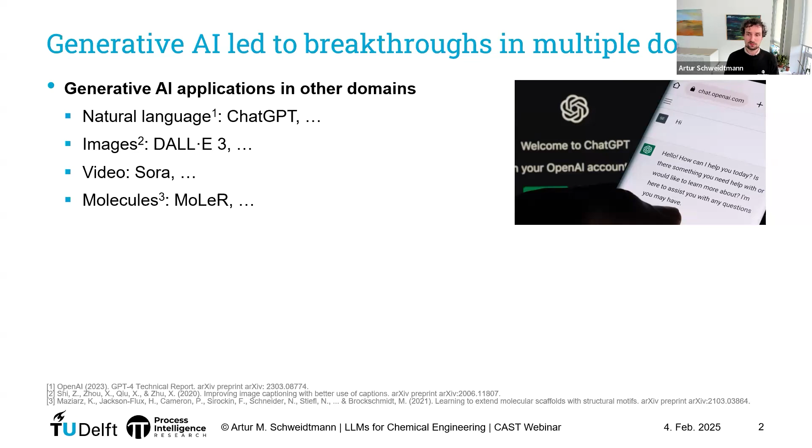And of course, these models don't work only on text or natural language. They also work on other modalities, we say. So we know there's images that can be generated by models like DALL·E 3. There's models that can generate videos, or more close to our domain, there exist generative models that can generate molecules, for example, molecular structures. And these have been or are currently developed in, for example, pharma companies, in research groups, and so on.

But I'd like to focus a bit more on the engineering aspect of chemical engineering, the process engineering aspect. And here we don't have much literature. We don't have a lot of tools available yet. So what I want to discuss with you is how would it feel like to have Gen AI or large language models in our domain, and what does it take to develop them, and would they be any useful? Is it feasible? Is there a business case for that? Is this the future, or is it just another random idea that turns out not to be making it to the practice?

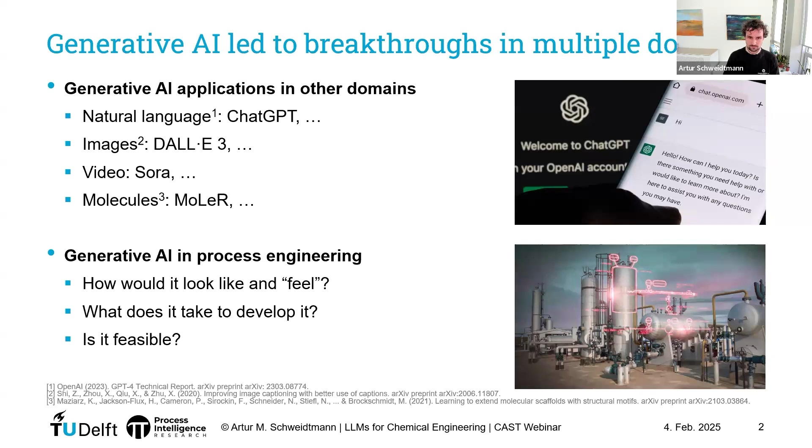And before I go into the engineering world, I'd like to talk about large language models and just give a few examples of different use cases where these kind of models are used. And the first one being GitHub Copilot. So in GitHub Copilot, we have large language models. Usually these are transformer architectures trained not on English language, but on computer language, on code. So this can be Python code, for example. So this is a model that is basically auto-completing your code while you develop it.

So for example, if you were to implement a function in a programming language like Python with a specific purpose, you could just write a small comment saying like, now I write a function that counts from 1 to 10. And there's a fair chance that GitHub Copilot would pick this up and directly give you an implementation or suggest an implementation for this function. And it's believed that these kind of models will really change the way we develop software. So it's believed that large language models like GitHub Copilot here will decrease software development cost by around 50% in the future and accelerate developments.

Of course, there's not only sunshine, there's also a lot of discussions about the use of Gen AI or large language models in these fields. For example, in the context of education. So if all the developers in the world are going to use these models, we may need less junior developers because the simple tasks are taken up by the model. But how are we going to educate our senior developers in the future if there are no junior developers anymore, for example? Or do we still need to teach that?

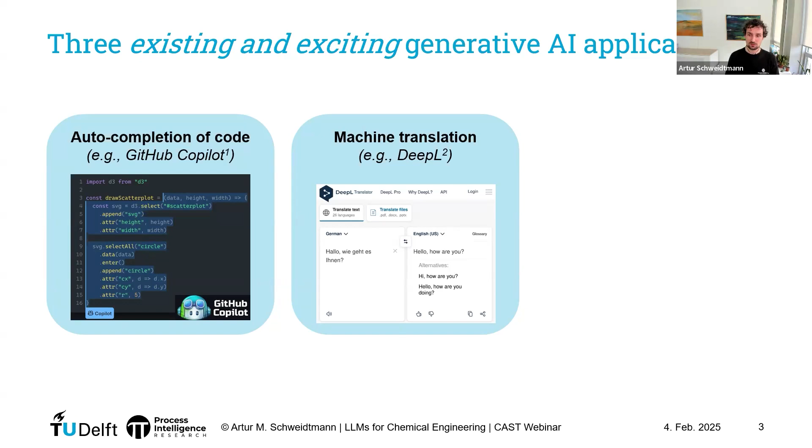So for example, if I were to give you a book and ask you, hey, can you translate this from Chinese to Japanese? You would likely struggle with this task. But with the help of large language models or translation engines that are often based on similar architectures, like neural networks with transformer architectures nowadays, you can do these tasks in a matter of minutes, maybe hours for a bigger book, right? And with very low cost compared to manual translation with a translator. And this is where we see this disruptive nature of large language models developed for specific applications. So they really changed the whole translator business, right?

Another example is Grammarly, which is a software for finding and correcting errors of language. Again, it's not only large language models, it's a combination of different models. It may not be as transformative as the other example, but still, if you're a book editor and I give you a book to edit, to correct, maybe with 2,000 or 3,000 pages, these kinds of tasks are significantly easier now, given tools like Grammarly. So it really reduces the number of errors you make in such writing. So what we see is in other domains, there can be a transformative action resulting from the use of large language models or similar Gen AI applications.

But I don't want to talk too much about other domains. I want to talk about the process engineering domain, chemical engineering. And here, what I want to emphasize is that most of the successful applications of large language models are based on language, on natural language. So here on the left-hand side, we have code. We have English text maybe. However, in our domain, we don't work that much with language only. We have a lot of the engineering knowledge encoded in different kinds of data formats.

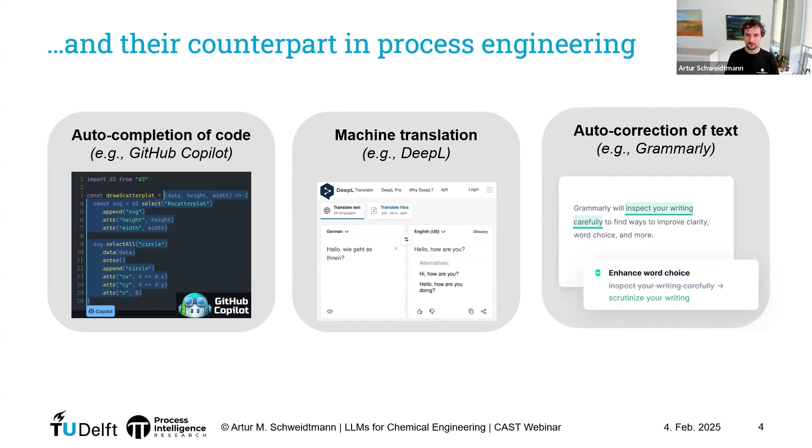The key point is really that I don't want to focus only on the modality text. So if you want to develop large language models or Gen AI in your domain, within chemical engineering or even outside, don't limit yourself to text. I think that's my main message, first of all. So what if we think about Gen AI more generally in chemical engineering? Well, if we apply this idea of autocompletion of code to processes, what we can think of is an autocompletion of chemical flow sheets. So would it be possible to develop Gen AI tools that help you to autocomplete or develop chemical processes? For example, by suggesting the next unit operation, the design specs of these unit operations, or the operating conditions, and so on.

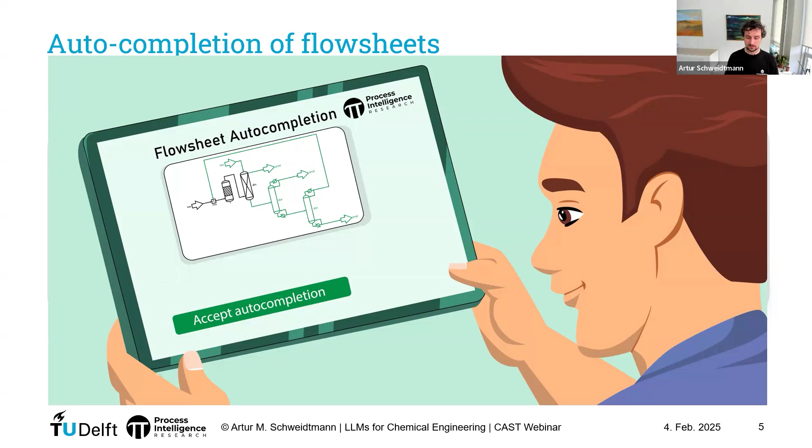And when we talk about translation, well, is it possible to develop algorithms that help us to develop a P&ID-like diagram from a PFD? So translate an early stage of development to a later stage. Or maybe translate is the wrong word here. Maybe it's rather learning what the engineer is doing.

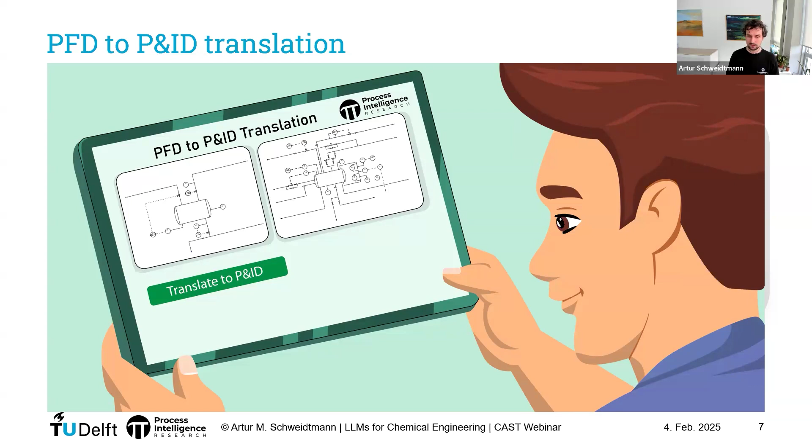And of course, there's not only the PFD diagram as an input, it's a lot more other documents. Most likely these are multimodalities, right? So we have the diagram information, but we also have text, like process descriptions, requirements, and so on. And the last one is quite obvious now. When we can find errors in text, would it be possible to also find errors in diagrams? Okay.

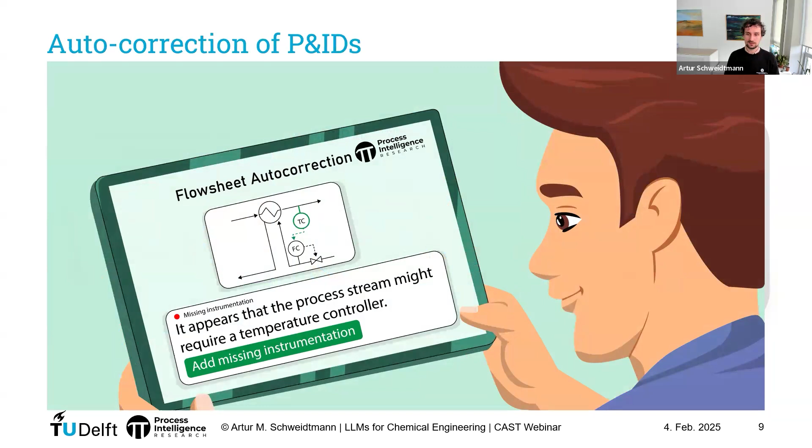So these are the first three applications that I wanted to show you. There's a fourth one that's quite relevant that we also look into in our research group, which is also related to making errors in P&IDs and finding them, especially in the context of safety. So would it be possible to automatically generate HAZOP reports from P&IDs and additional process data?

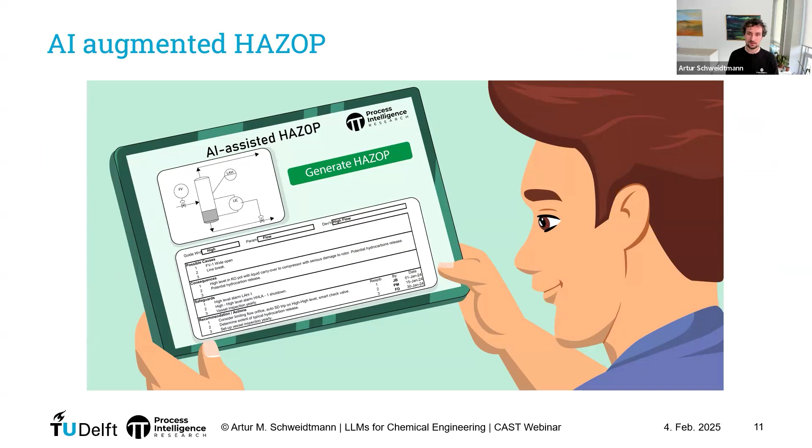And of course, all of these applications are not meant to replace a human, but rather work together with a human, assist the engineers essentially in their day-to-day work. So if we have this idea of Gen AI or large language models helping us to develop processes, translate from one stage to another, find errors, generate HAZOPs, helping us to do our job.

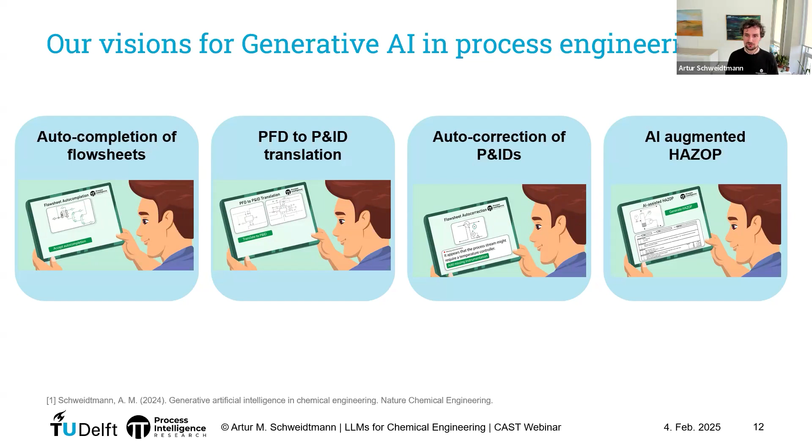I think one of the main questions is, well, can we just do it with the tools that are out there already? Can we just go to ChatGPT and ask, hey, can you help me to develop my process? Can you please draw a chemical flow sheet for producing this product? And I'm not sure if you have tried it. I tried it many times. The answer changes over time, of course, but I give you the general gist of the answer.

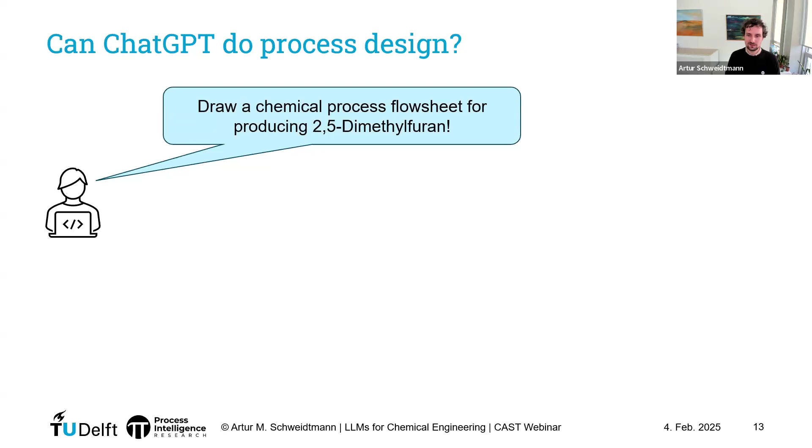So in many cases, the models are quite positive, first of all, which is good, right? So I want to hear, hey, I can solve your problem. And what you see is the model also figures out that, well, it needs to generate something beyond text. We're asking for a diagram, so it needs to generate an image in this case. And it takes a bit of time till ChatGPT has generated this image.

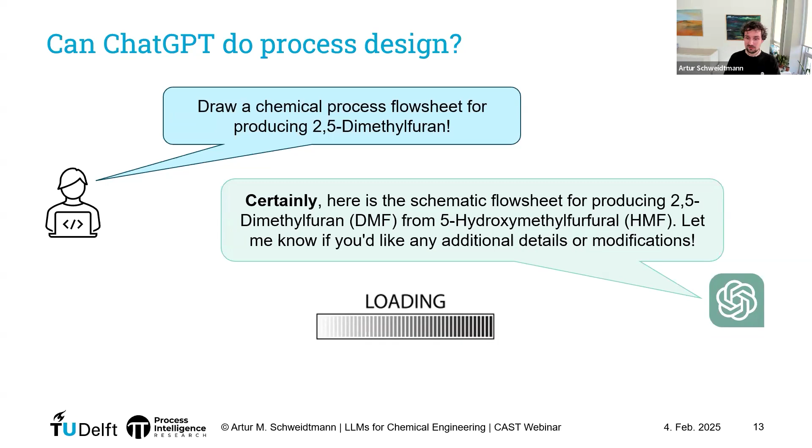So we have these powerful models, ChatGPT. We know they're knowledgeable, they're trained on the whole internet. Still, they're not really useful in our domain if we want to do anything particularly useful. So the question is, how can we overcome this gap between the performance of these general multi-purpose models that are accessible through the internet and our vision of an industrial co-pilot, a Gen AI helping us to do our engineering job?

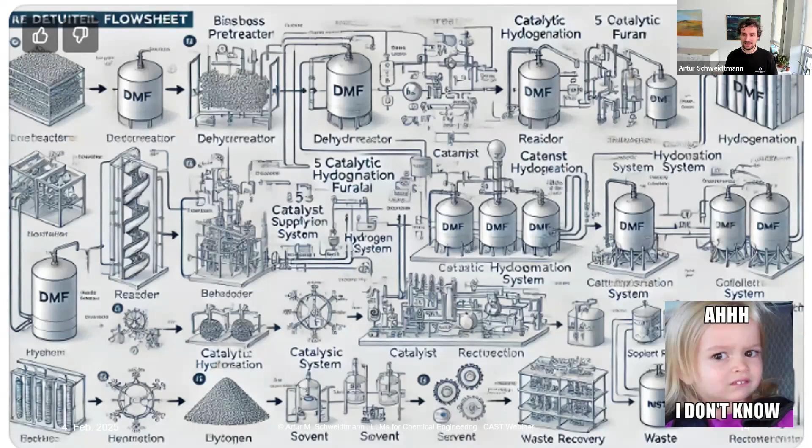And I think here it's worth to step back and look again at what are the key ingredients that made ChatGPT so successful in this text domain for many other tasks. And what I recognized is, well, it's mostly a combination of the data that was made accessible, a meaningful representation of the data in form of text, and then the model architecture, of course, right? So there's a lot of work on the machine learning side developing these transformer architectures that are so powerful.

And what we want to figure out is, what do we need to do in process engineering or chemical engineering or organic chemistry, or maintenance maybe, in order to get similar results?

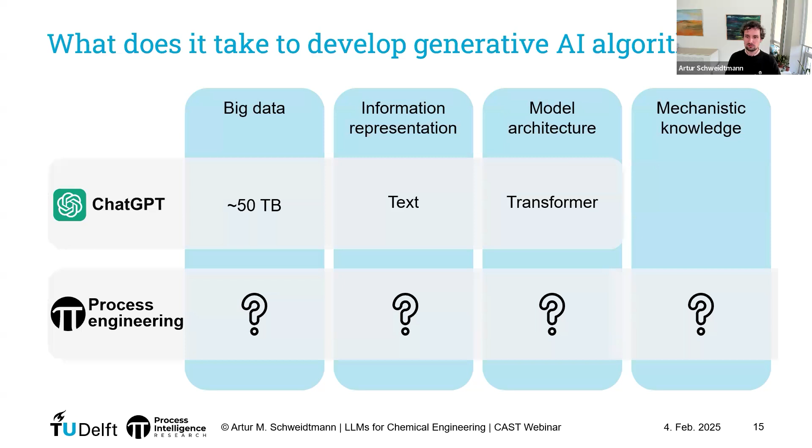And the first question mark is a big data one. And here's a simple question that we need to answer. Is our domain, is chemical engineering, actually a big data domain? Because if we don't have any data, well, we can't train any models, and that's going to be very difficult for us to develop large language models or Gen AI for our domain.

And if you read the literature, if you discuss with your colleagues, it's very likely that you find this answer. Our domain is not a true big data domain, because we have limited data. We are not like text or images that you can find on the internet and just train your models on. And this is why we are still developing a lot of hybrid models, physics-informed neural networks, and so on. And we do that as well in our research.

I believe in hybrid modeling, physics-informed neural networks. I think there's a lot of value in that. However, what I also believe is there is more data than we use at the moment. So we as engineers, we generate a lot of data in our day-to-day life. We do simulations, for example, in Aspen, in DWSIM, maybe CFD simulations in Fluent, maybe in other software.

We write patents, we do molecular simulations, we measure properties, we write in lab books, we write emails, we write papers. So there's a lot of different information, data that we generate. So why do people say that we don't have big data or any relevant data in the engineering domain? Well, I think the main issue is not that we don't have any data. I think the issue is that our data is very heterogeneous. It's not findable. It's not machine readable.

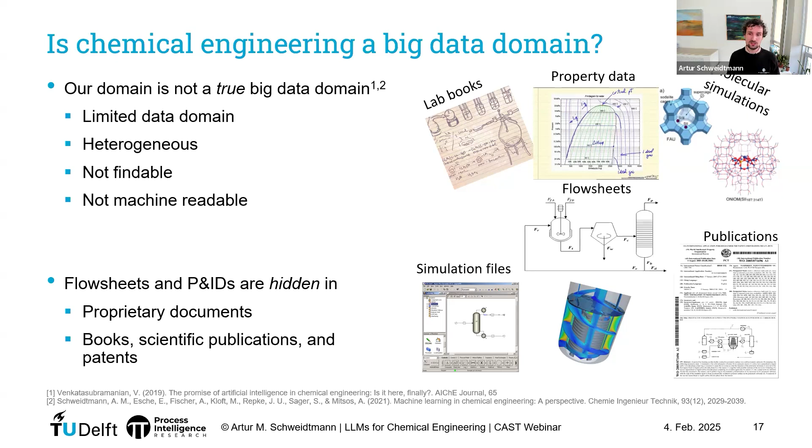Maybe even on purpose be simplified to an extent that is not usable. But if you figure out a way to get this data, or if you're at a company having access to vast amounts of P&ID or PFD data, maybe you have big data available already. I talk to a lot of companies that tell me, like, we have 100,000 P&IDs, no problem. But then still, this data is usually not machine readable yet. Usually these are P&IDs or PFDs that are saved as PDF documents designed for human communication, for engineers.

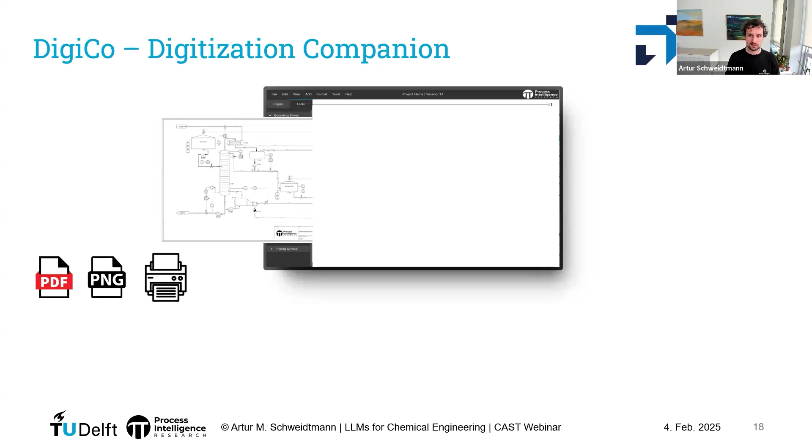So the challenge is, how can I make the information on the P&ID accessible for a computer? And here a development comes in that we have been developing over the last 5 years, which is called Digitization Companion, where you can basically read in PDF documents of P&IDs or process flow sheets, and it's connected to a number of machine learning models that we're developing, including object detection, connectivity detection, text detection, table extraction, and so on. And you can run these models in the cloud in order to generate smart P&IDs. So basically, these models are recognizing all the symbols on the P&IDs, their connectivity, and contextualize all of that.

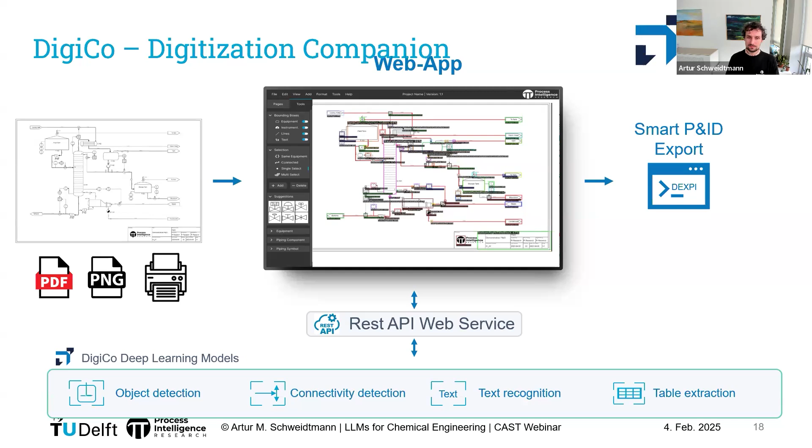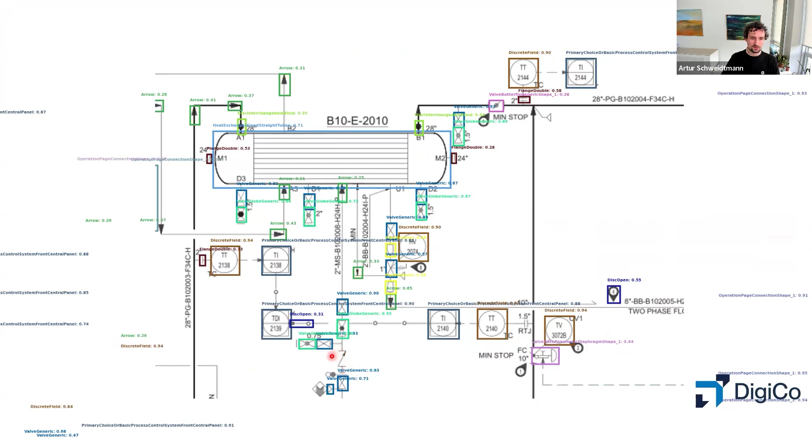And I think I have an example of that. So here we just have an image of a simple P&ID. And here's an example of just the object detection part. If we zoom in, we can also see that a lot of the equipment can be recognized by object detection already. Of course, it's still under development. So we have a few, for example, this valve here is not detected yet. But we are confident that we can do that as well in the future.

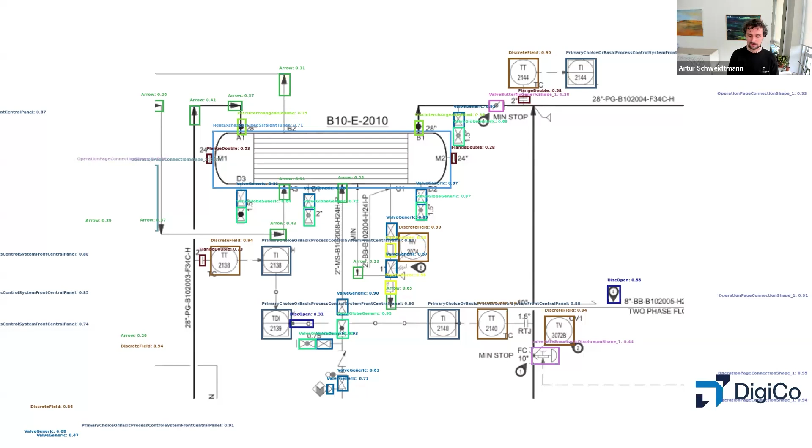And this is really necessary if you want to work with P&ID data on the computer. Because you need to know not only the pixels on an image, you need to know what the meaning of this symbol is. And you need to know what the topology of the process is. And that's what you get in a smart P&ID.

Once you have the information in a digital format, we need to think about how to represent it in a way such that a machine learning algorithm can later on process it and learn from it in an efficient way. So if we look at the flow sheet, one way to represent it is a graph structure. So here we can think a bit about basically nodes being the unit operations and edges being the connectivities or the streams, right?

If you go a bit more into detail, you will recognize, well, that's not sufficient. You need to encode more information. Probably you need an ontology. You want to build knowledge graphs, hypergraphs. There's different graph representations you can come up with for a process. There's a different way to represent flow sheets. You can also encode them as strings. This is inspired by SMILES strings for molecules.

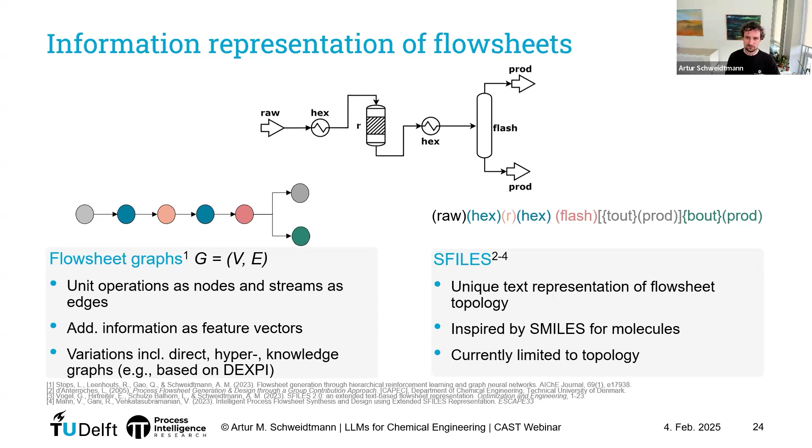And this is relevant because it allows you to encode your process information in a format such that you can use standard large language models. So if you want to get a quick success in developing a Gen AI for the engineering domain, it might be helpful to encode your information such that you can just use a model out of the box or fine-tune a text model. If you want to build a big infrastructure for Gen AI in process engineering in the long term, I rather recommend you to change the model such that it fits the data. And then I think the graph representation is more meaningful and more powerful.

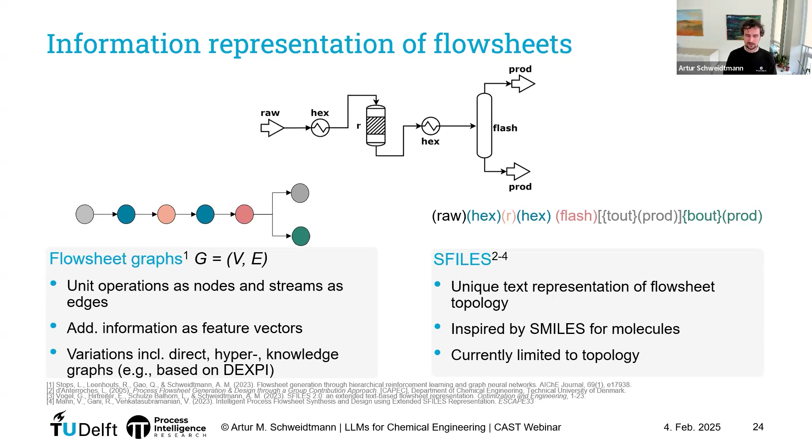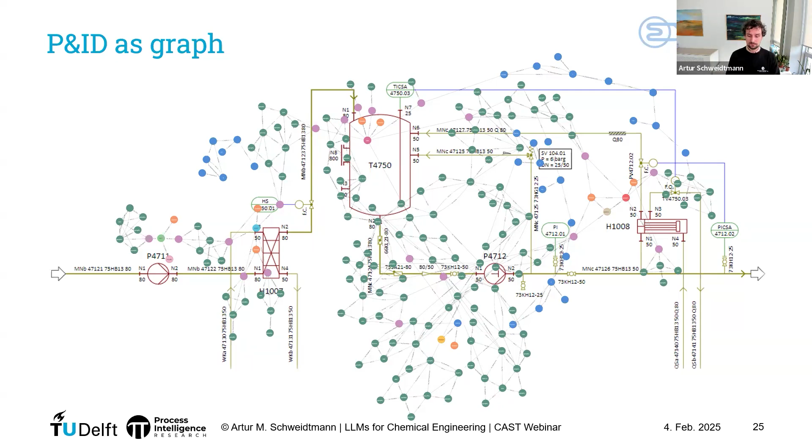What you can do as well is you can build abstractions on these graphs, right? So we can sum information together, lump nodes together, and build simplified high-level graph information as well. So that's another advantage. If you have the information in digital format, well, you can apply these operators basically on your data to represent information on different hierarchy levels with different focus for different applications. And you can already connect this graph structure to a large language model.

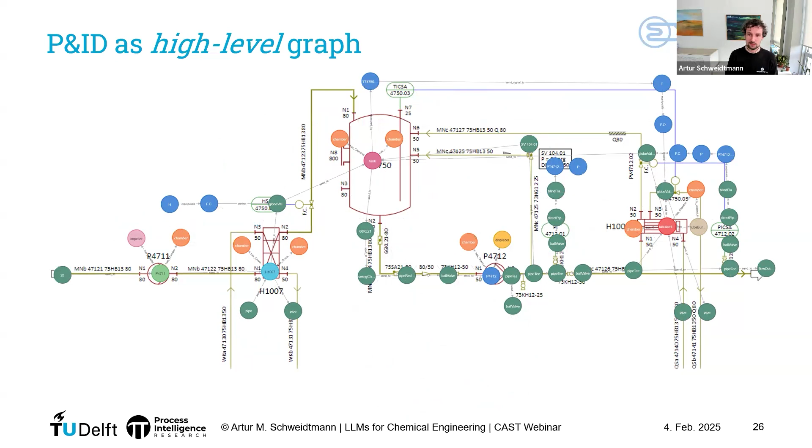So what we did here is we have this P&ID. We encode it as a graph. So this is now in a database called Neo4j. It's a graph database. It's also annotated with additional engineering data, maybe a diameter, an exchange area, and so on, design pressure.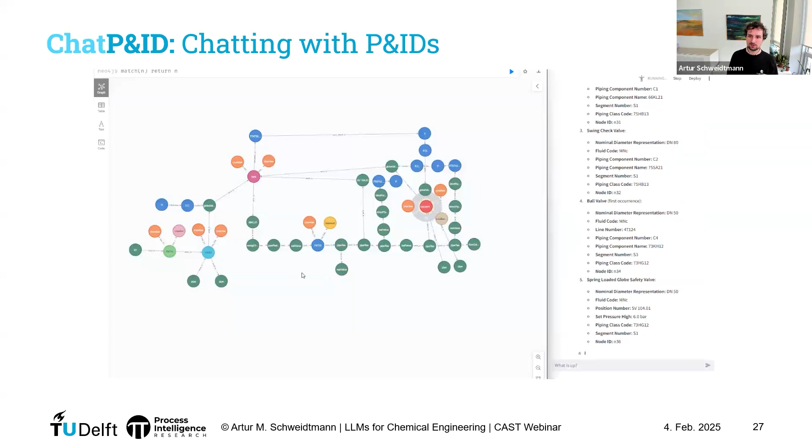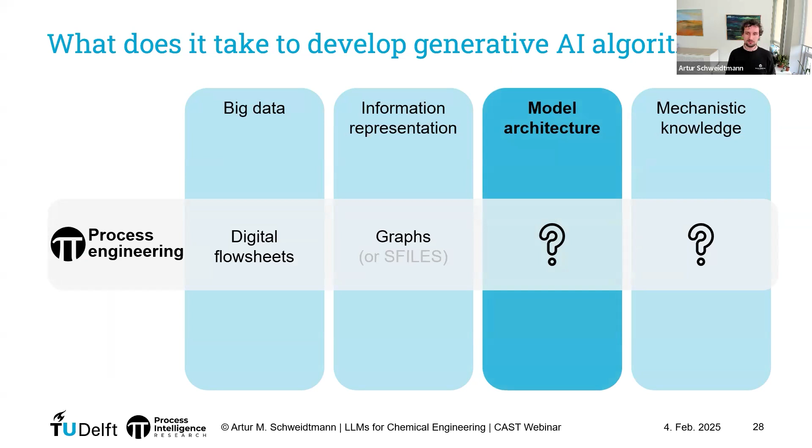But our ultimate goal is to develop new models for our purpose, for the engineering world. And here I don't want to overcomplicate it. So what I want to emphasize is depending on how you encode your information, you need different model types. So if your information, your data comes in as strings, as text, as sequences, most likely you will end up with some kind of transformer architecture, right? So these are the types of models behind most of the Gen AI large language models that are out there. So ChatGPT is based on some kind of transformer architecture.

But if you represent your data as a graph, what you need is a machine learning model that is capable of processing graph-like information. And these are usually graph neural networks. So these are architectures that are well known in chemical engineering, mostly in the molecular machine learning world for predicting properties of molecules, for example. But they can also work on flow sheets and flow sheet graphs.

And of course, you can also mix and match a bit. So you can have a transformer with a graph encoder. You can have generative adversarial networks, variational autoencoders. You can build diffusion models. There's a lot of variations of Gen AI models, large language models that we can leverage for different applications.

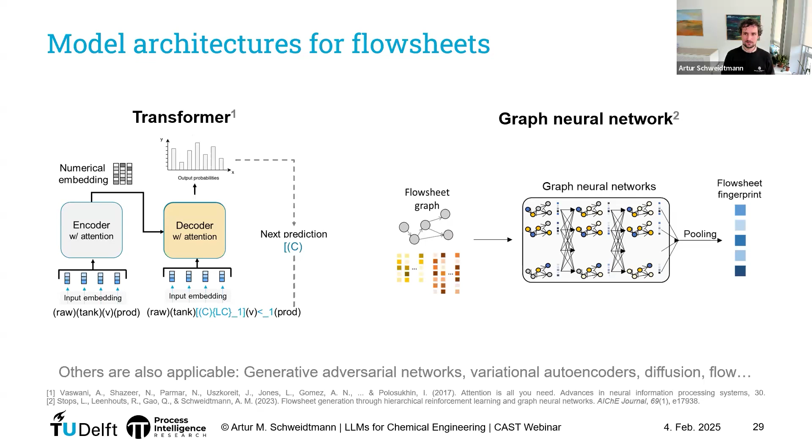Okay, so what I want to do is highlight at least one case study where we trained a simple generative AI model for one of these engineering case studies. And I picked the autocorrection one because I think it's quite nice to understand, quite easy to see what's possible already and what we need to further develop in the future.

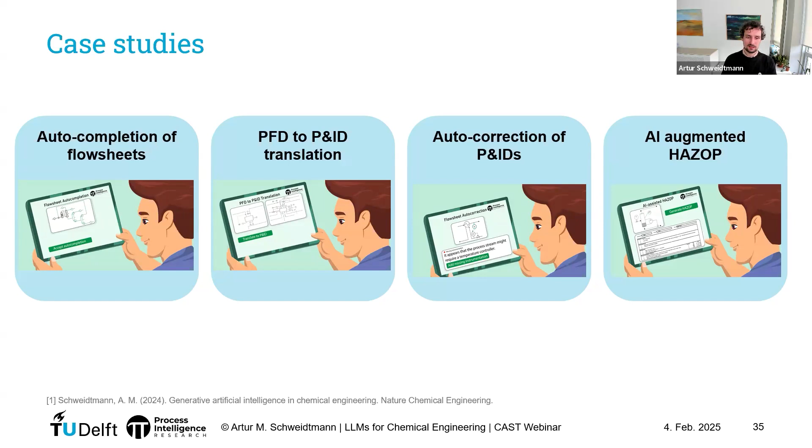And as I mentioned, this autocorrection is a bit inspired by tools like Grammarly, and they don't work only with Gen AI. They usually have a combination of rule-based systems and AI systems. And that's what we want to develop as well. And I think that's quite sensible because these rules have a lot of advantages, especially for safety critical stuff, but I'll come to that. So how do rule-based systems work? Well, what you need to do is implement or define your rules as graph patterns.

And what is a rule? Basically, a rule is an error pattern. So a potential error you can make in a P&ID with a way how to correct it, with a correction graph. And then what you can do is run a rule inference algorithm on the graph that is helping you to find all the erroneous patterns and correcting them.

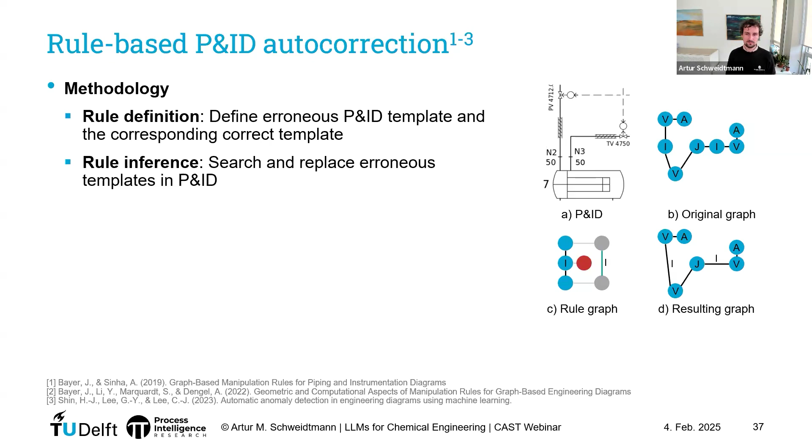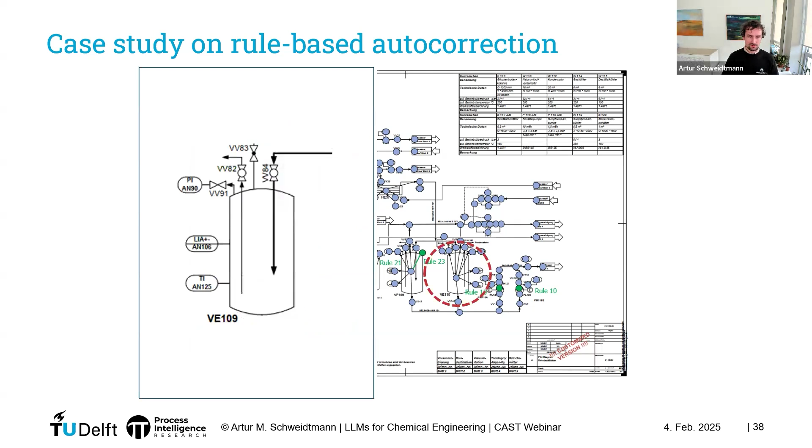So this is an example. Here we have a P&ID as a graph. And we took a look at one of the parts here. We just have a vessel. And we have a rule implemented which says install a pressure relief valve for all tanks with a design pressure greater than 3 psig. What you see is there's no pressure relief valve here.

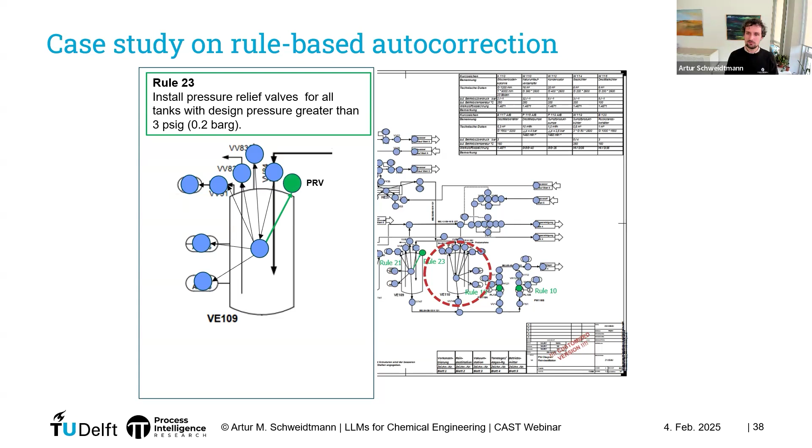And this is what the algorithm is also recognizing. Hey, there is this graph pattern that is basically wrong. We need to apply this rule. And it can automatically add this pressure relief valve. It's not only adding the pressure relief valve, it can also give a message to the user, to the engineer. Hey, I applied rule 23 on this part of the P&ID. Do you confirm? And this running of the rules, it's extremely quick.

So we can run rules in hundredths of seconds on large P&IDs. It's extremely reliable as well. So if you implement a rule, you can be sure that it's going to be found and applied.

However, there are also a few limitations. It's not easy to implement such rules. The data models behind the P&IDs are extremely complex, quite detailed, and you need to understand very well what you're doing. And because the data models are so detailed, the scope of the rules is quite narrow. So you need to define exactly what you mean. Otherwise, you're going to miss it. So it takes a lot of skill to implement these rules and not to miss it or implement them in the wrong way.

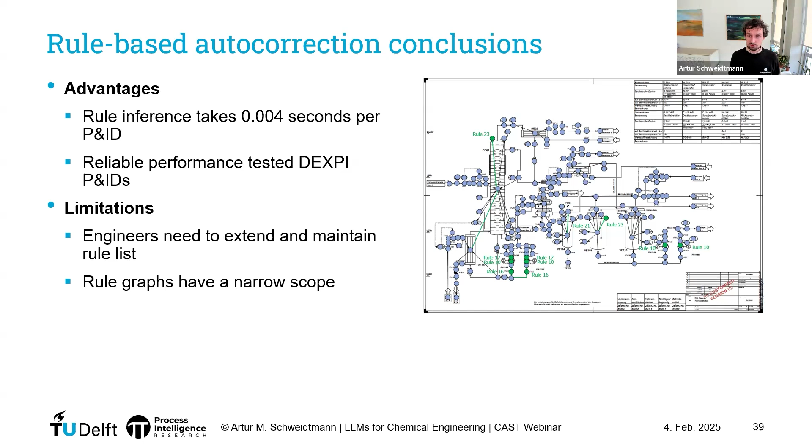So the real vision is, if we implement a few safety critical rules, that would probably be important and good, right? But can we do more? Can we also automatically extract rules or error patterns from existing P&IDs? And this is what we want to do in the future. Basically, leverage the implicit knowledge that is hidden in the existing data.

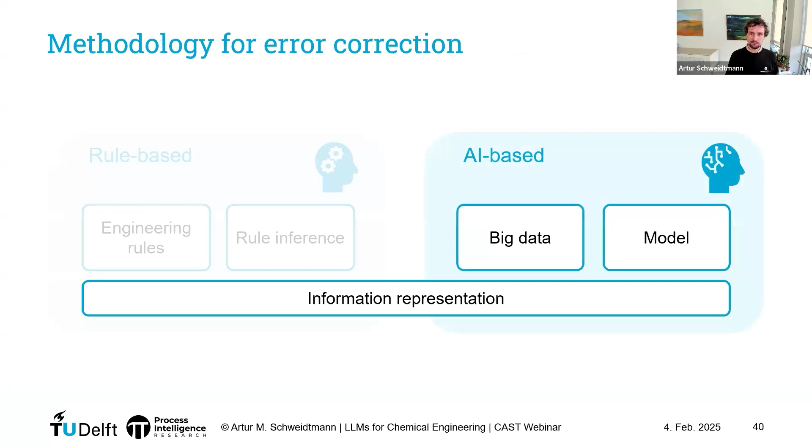For now, we did a first step in this direction through a supervised learning algorithm. We have a transformer model, a sequence-based model, so a model that takes text in and text out, kind of. How do we manage this? Well, we represent our data as strings, as these SFILES, so flow sheets encoded as strings. The input of the model is a process flow diagram with potential errors, and the output of the model is a corrected PFD.

And we generated a lot of this synthetic data. So we didn't train it on real P&IDs or real PFDs, but we just said, if we have data available, would it work? And if we look at the accuracies, they're relatively high already. So what it tells us is that in general, machine learning models, these transformer architectures, can also learn from process structures, from process topologies. And not only learn from, but also generate process topologies.

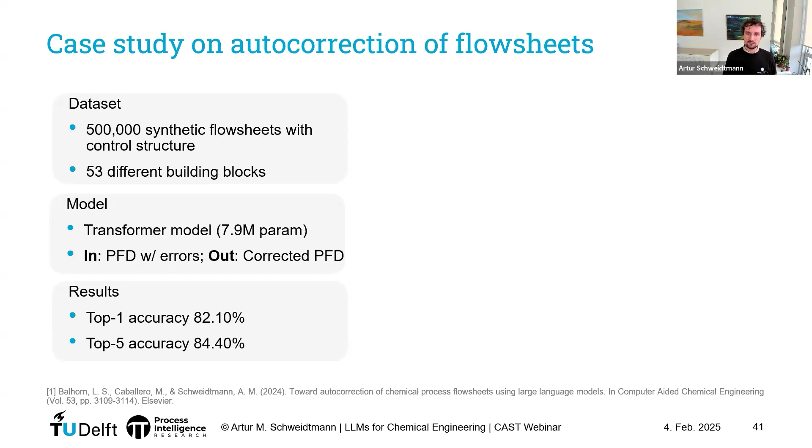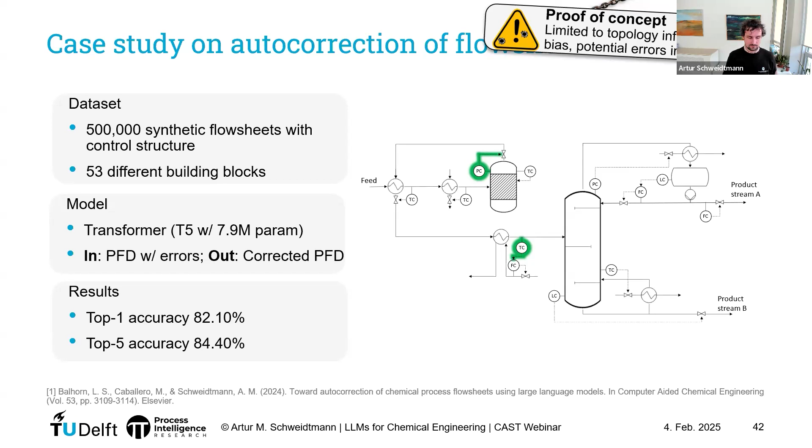So what I showed you are these individual applications here. And we have trained individual models for all of these applications. But I think what is important to recognize is that there's a lot of synergies. And you can see that in ChatGPT as well.

So ChatGPT as a large language model, it's not particularly successful because it's very good at one specific task, like writing a poem for the birthday of my mom. It might be quite good at that, but that's not why you use ChatGPT, probably. You use it for completely different tasks. And it turns out to be good at many different tasks because it has seen so much diverse data. And it somehow leverages synergies between different tasks, even different languages.

And I think that's what we need in our domain as well. We don't aim to develop individual models for autocorrection, HAZOP, and so on. What we aim for is to leverage some of the underlying knowledge that all of these different tasks have in common. So basically leverage the synergies. So have more foundation kind of models for our industry.

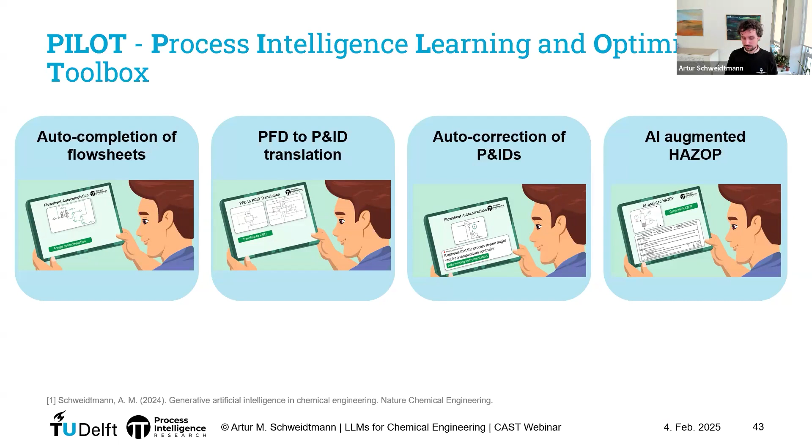And there's a second idea that I believe is quite relevant. That is the idea of multi-agent systems and multi-modal information and tools. So I believe there will be not one model doing the whole process development in one step, right? So this is unreasonable to expect. I believe it will be individual models communicating with one another and also using our tools and data and databases.

So when you develop a chemical process, you're using databases to get properties, simulation software to estimate how the distillation column might behave. Maybe you look into a book in order to get a heuristic in order to design the sequence of a distillation column. Or maybe you just remember it from your studies. We need to make all of this information explicitly accessible for the large language models as well. And we can do that through tools.

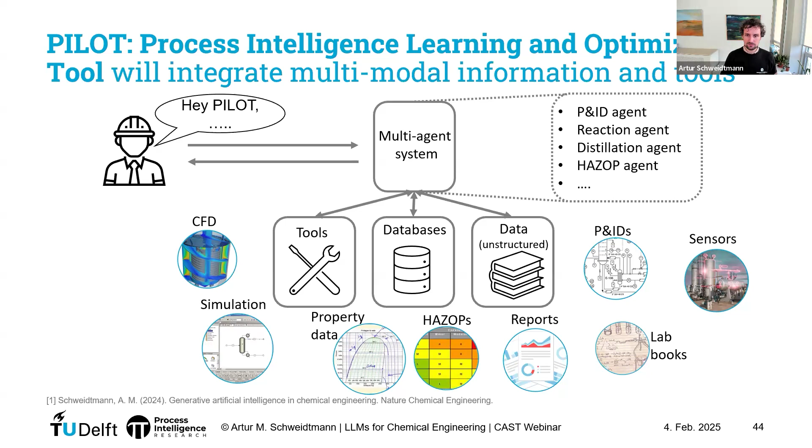And before I finish, I want to just give you one example to give you a bit of an idea of how it looks or works, this interaction of large language models and tools. Here we have an example of a chemical database with properties. And what we did here is a very simple study where we ask, hey, large language model, can you ask a SQL database, a relational database, for the properties of a particular substance? And we made the large language model generate the query code as a string, and we just pass that on to the database.

And it turns out this works quite well. And we're not the first to do that. So this is already established knowledge. You don't need to retrain your models. There are frameworks helping you to do this in an efficient way. But setting up these pipelines can basically help you to connect large language models with structured information.

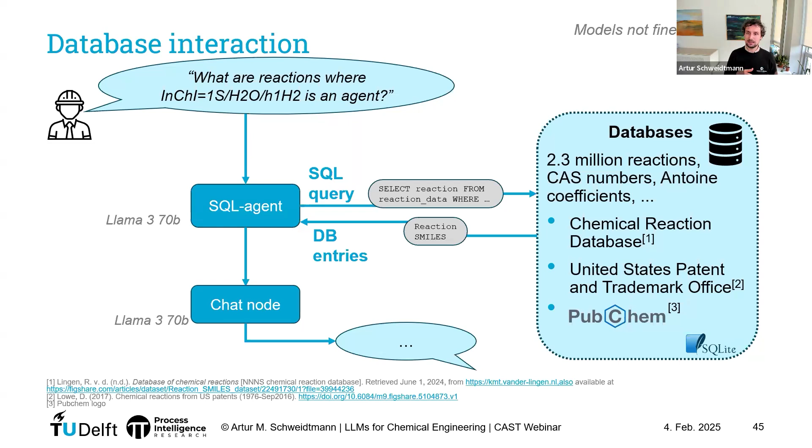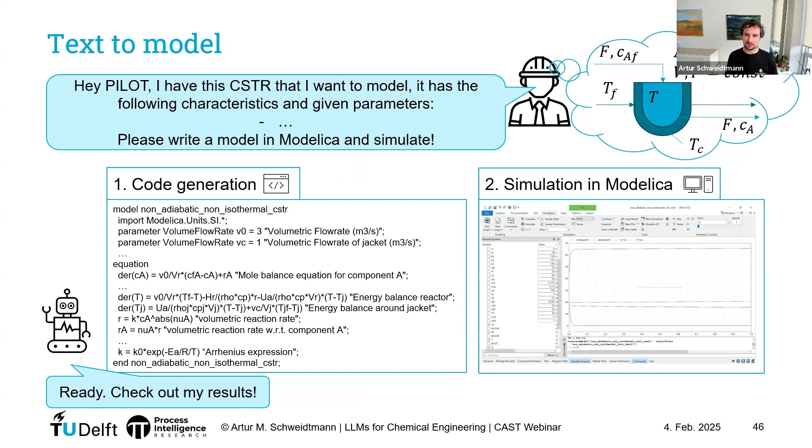And you can also use the same principle of basically a large language model being able to output structured text also for generating models. So here we trained a large language model to generate Modelica code in order to simulate dynamic reactors. So there's a lot of potential in connecting large language models to these different tools and databases, but also training new models on our data.

And this you can only do, and we only did, in collaboration together with industry. So I want to thank my collaborators. I think these collaborations are really key to successful innovation in this area.

And I'd like to conclude. I think the digital engineering data is really key for future AI applications. The good news is Gen AI can learn from and generate flow sheets. Collaboration is key, otherwise it's not going to work in this area. And I think there's a big potential of Gen AI and large language models to change the way we design processes.

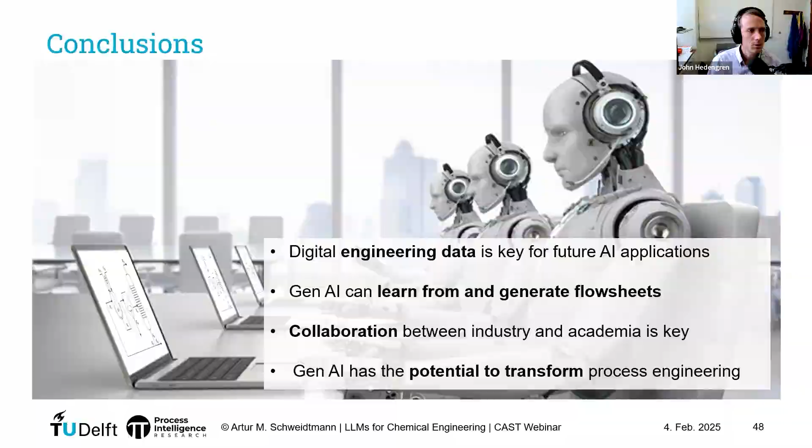First question is, how are you currently using or planning to use large language models in chemical engineering? And so in terms of process systems engineering, there might be process optimization and control, research and literature review, data analysis and predictive modeling, automating documentation and reporting, or I haven't explored LLMs yet.

Second question, what concerns you most about using LLMs in chemical engineering applications? One, accuracy and hallucinations in responses, data privacy and security risks, lack of interpretability and explainability, computational costs and infrastructure needs, or I have no major concerns. We also have a third question there. How quickly